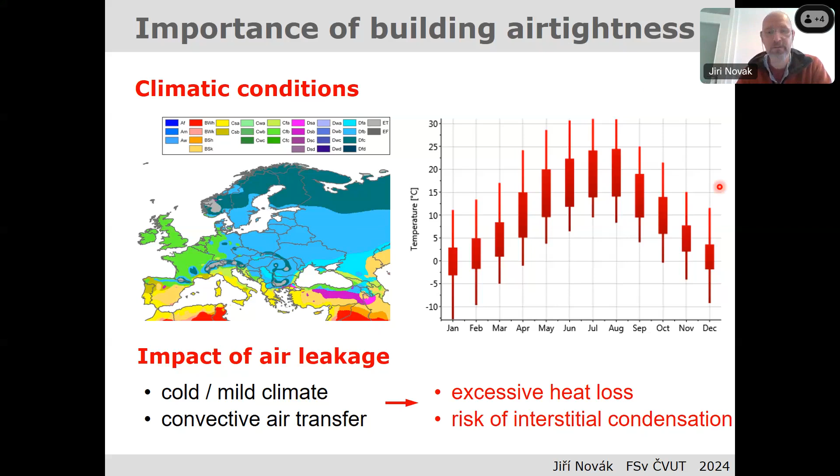For the beginning, let me remind some basic facts about the air tightness in Czech Republic. So despite the global warming, we still have cold winters in Czech Republic. It means that the air infiltration can significantly affect the heat loss, and it can result in a risk of interstitial condensation and consequent structural damage of the building structures. For these reasons, we have some limit values for building air tightness in Czech technical standards.

These limit values are not requirements, just recommendations. So normally we should fulfill these values, but the proof of compliance is not mandatory. It means that we don't need to prove these values by means of air tightness measurements.

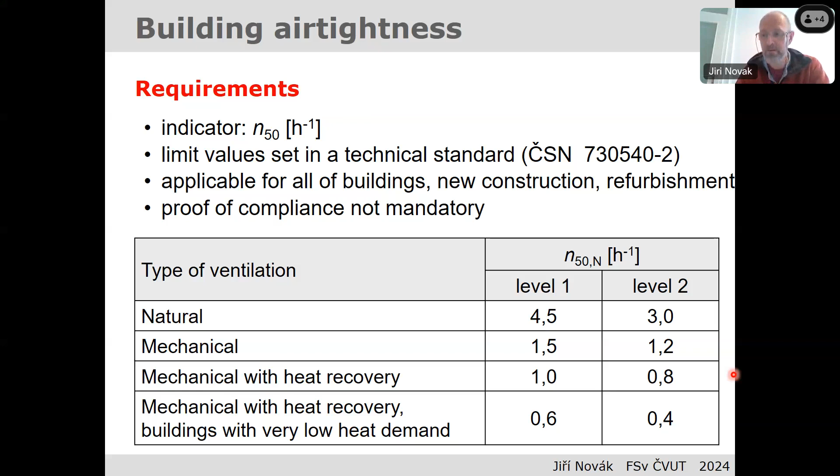And this means also that we don't measure systematically the new buildings or the building production in the Czech Republic. And as a consequence, we don't have a real image about the air tightness of new buildings in Czech Republic, just in few sectors of building constructions. So we assume that less than 15% of residential buildings are tested.

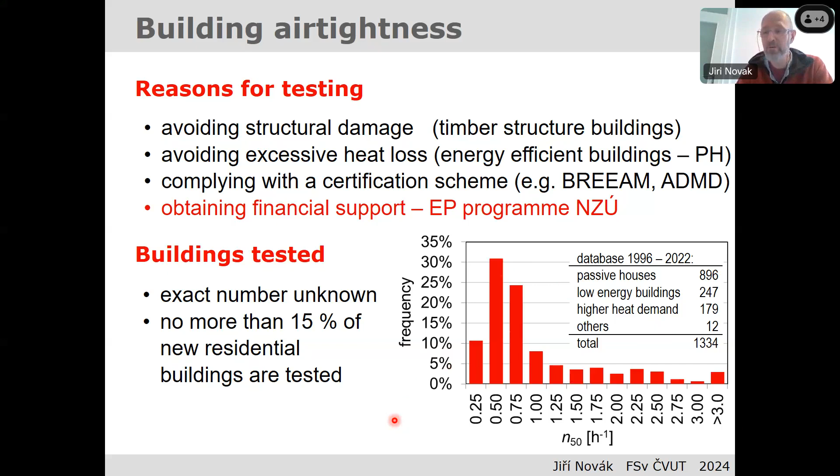The effort to reach a higher energy performance is obviously a strong motivation for air tightness testing. So the buildings tested are mainly the passive houses, low energy houses, and also timber structure houses, where the reason for testing is the effort to avoid the structural damage linked with the condensation. This graph shows that we are able to construct very airtight buildings.

Concerning the energy performance calculation, I would like to just remind that Czech Republic, as a European member state, must implement the EPBD, and this implementation is made by means of law number 406. But this law just imposes the obligation to fulfill some energy performance requirements and the obligation to issue the energy performance certificates, but gives no details. The details are given in subordinate legal documents.

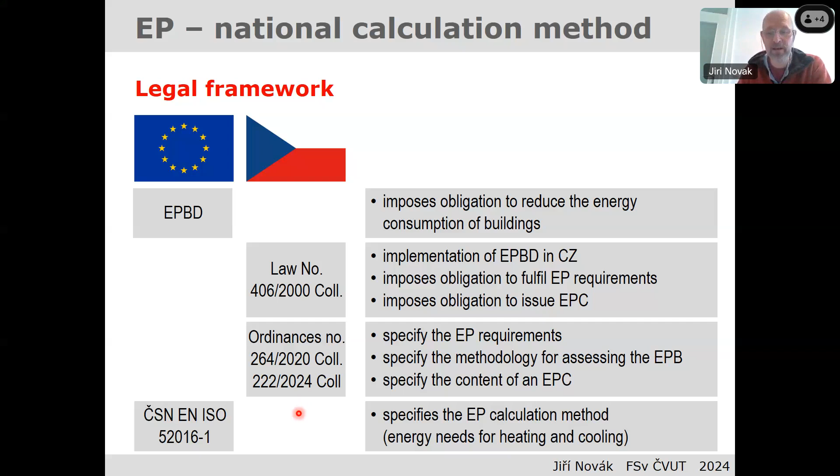It means ordinances which are mentioned here, and in these ordinances the general framework of the calculation method is described, and some input values are given as well. These ordinances as well specify the content of the energy performance certificate. For the technical details of the calculations, these ordinances refer to the system of European energy performance standards. And the result is, of course, the energy performance certificate.

So until 2024, the energy performance certificates were issued at the moment of application for the building permit. It means that the certificates were prepared during the design process of the building, at the moment when the airtightness cannot be measured, only estimated. So it is of course a source of uncertainty, and the reliability of the calculation and of the result is in this case questionable, because the information about the real airtightness cannot be put into the calculation.

Since 2024, we should prepare the energy performance certificate for commissioning of the building. So there will be the possibility to measure the airtightness and to put into the calculation the measured value and to obtain a more accurate result, more reliable, closer to the real thermal behavior of the building. But there is still question if the energy performance experts who do this kind of calculation will change the old habits, and if they really will use the measured data in order to improve the accuracy of the results. There are some doubts about this.

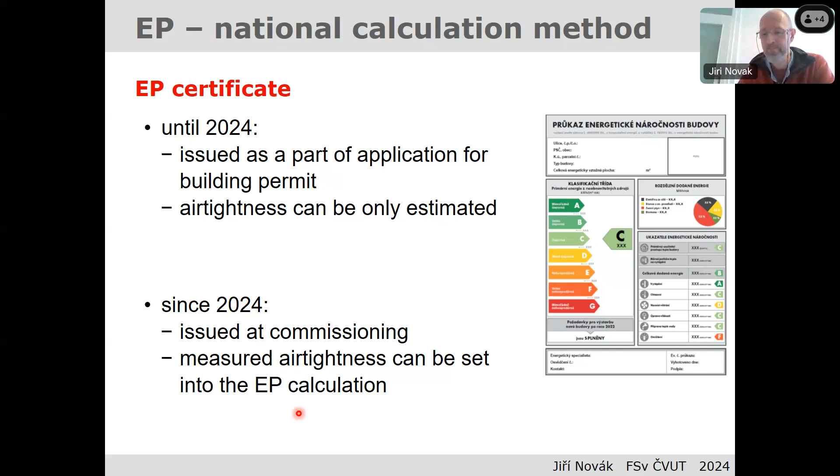Yes, for the calculation method itself, we use the European EPB standards, the whole complex of these standards. We use the hourly method for the energy performance calculation. However, the use of a monthly method is still allowed, but only for very simple buildings like single-family houses, for example. And we expect that in few years only the hourly method will be used. We have a lot of input values into this kind of calculation. It requires a lot of data. And this data is taken usually from annexes of the European standards.

However, some of the input values are set at the national level, and this is the case also for input values for calculation of ventilation heat loss. As one step of this calculation, we have to determine the ventilation airflow rate. It has basically two components: the ventilation itself and air infiltration through the leaks in the building envelope.

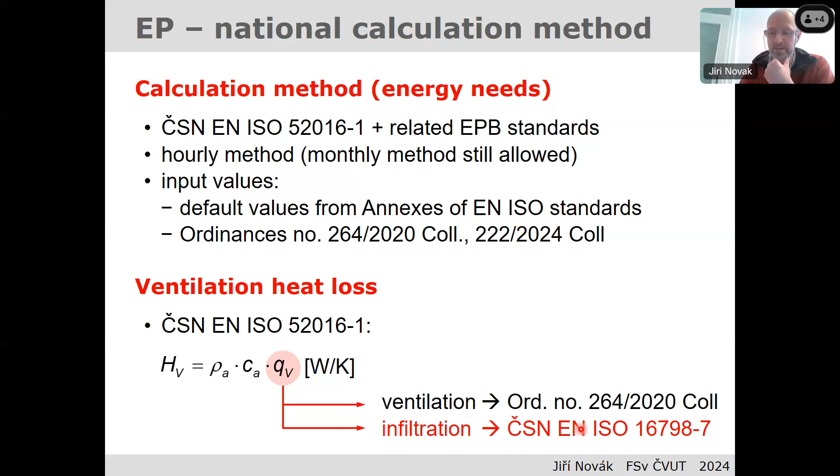So this standard can be used for determination of the whole ventilation airflow rate, meaning ventilation plus air infiltration, but we use this procedure only for determination of the infiltration airflow rates. We use method 1, exactly as Valerie has explained, and we use a 1 hour time step.

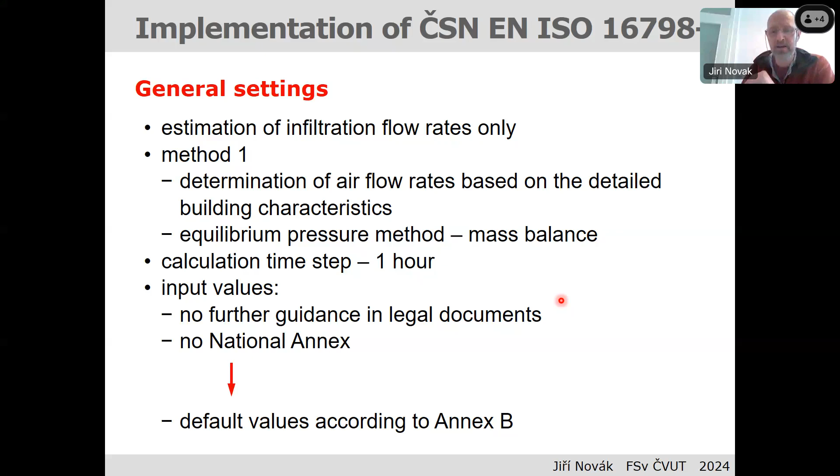Yes, and concerning the input values, there is no guidance in the legal documents. For example, the ordinances neglect this problem completely. We don't have any national annex with further details in this standard. And for the calculation, basically, we use default values as they are set in Annex B of this calculation standard. This is the more detailed overview.

Here you can see the calculation steps of the air infiltration airflow rate, and here the input values. As you can see, we use really only the default values of Annex B, and in the most frequently used software tools, only the meteorological wind speed and the building air tightness can be changed. So the user can change only the climatic condition, the wind speed, in fact, and the air tightness of the building. Other inputs, including the scheme of the air leakage distribution, are fixed, and we cannot change them.

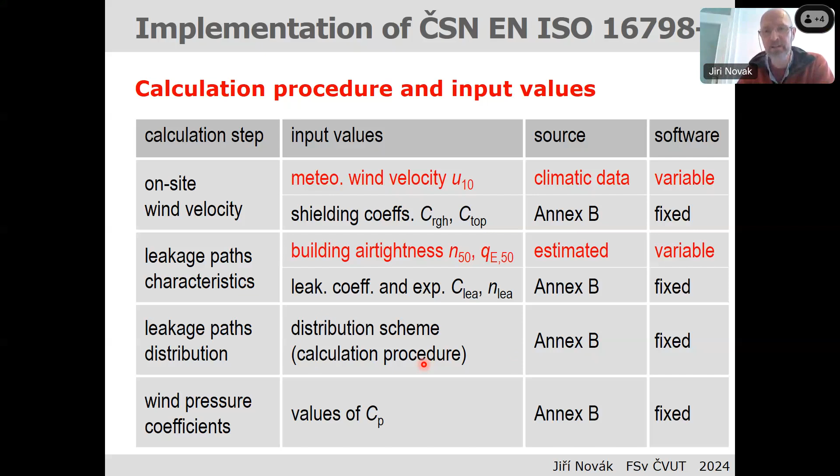So we have a quite advanced method which allows us to include all these aspects in the calculations, but usually it is not possible to do it by means of the standard software tools. Concerning the estimation of the building air tightness, the energy performance experts who calculate the EP certificates have no guidance. We have no default values. We have no tables, just in the standard with the

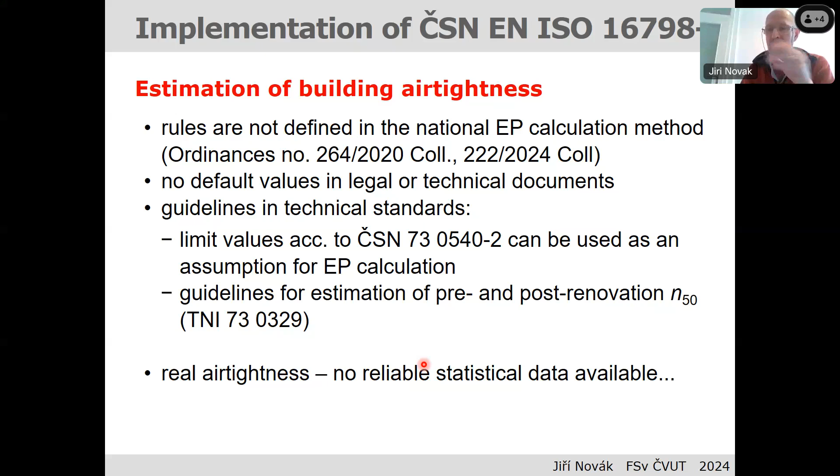recommended values. It is stated that as a design assumption during the design phase, we can use the required or recommended values as inputs to EP calculations, so we can imagine that there may be a big discrepancy at the end between the real performance of the building and the result of calculation, because we expect that the limit value will automatically be fulfilled. And as we don't have statistics on real air tightness in building stocks, we have no statistical data which could be used for estimation of the typical building air tightness in EP calculations.

So, in conclusion, what is positive is that we use a very accurate method, one of the most accurate methods. And good news is also that it is included in standard software tools used for EP calculation, and the user cannot avoid this problem. They cannot pass by, ignore or neglect the air tightness of the building in the calculation. But there is still big room for improvement,

because we don't have the data for estimation of the real air tightness, and the problem is also the limited competence of energy performance experts. They can use a very accurate and very complicated method, but in most cases they have no insight into this problem, and they are not able to accurately estimate the building air tightness and to choose or put other input values in order to have an accurate result.

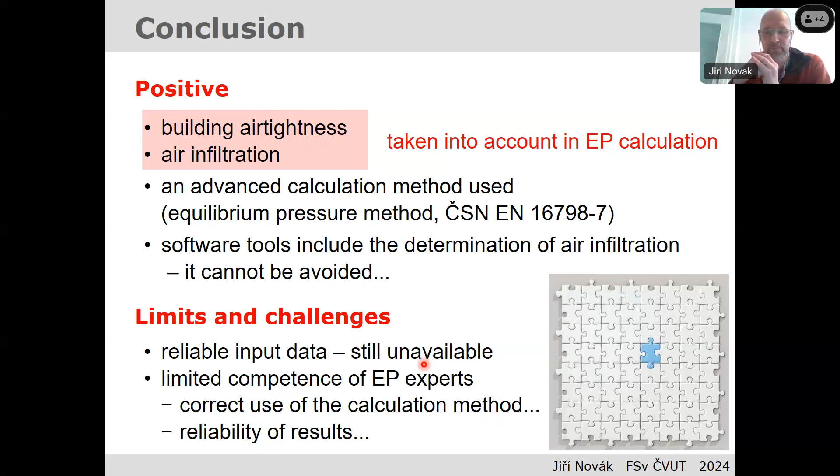For them, it's just a small piece of a big puzzle. The calculation of energy performance is very complex, and this is only one piece, and they still have no expertise to do it, let's say, correctly and accurately. So this is about the situation in the Czech Republic.